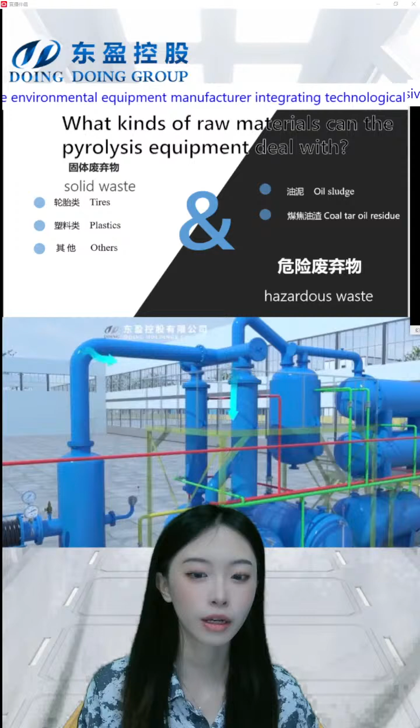This is the Doing Company, and today we are going to have an introduction about what kind of raw material a pyrolysis equipment can deal with. I want to introduce hazardous waste, because we have already introduced solid waste like waste tire and waste plastic, and today our topic is what kind of hazardous waste can use the pyrolysis machine to recycle.

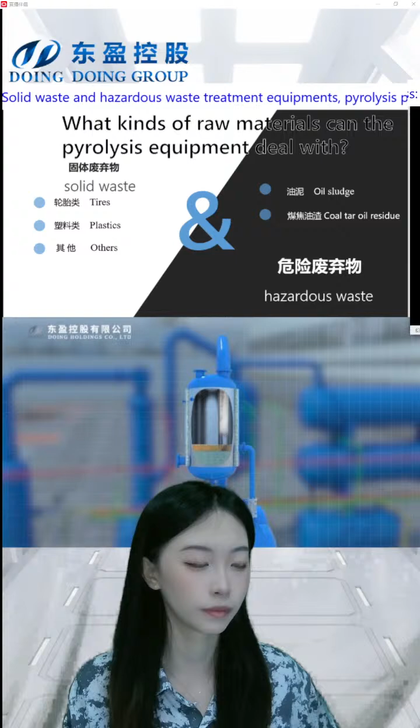Today's topic is what oil sludge can be recovered by the pyrolysis machine, or what kind of hazardous waste. There are many types of oil sludge, different kinds, and today I'm going to introduce which of this waste can be recycled by the pyrolysis machine and can get profit, get the recycled oil, the fuel oil.

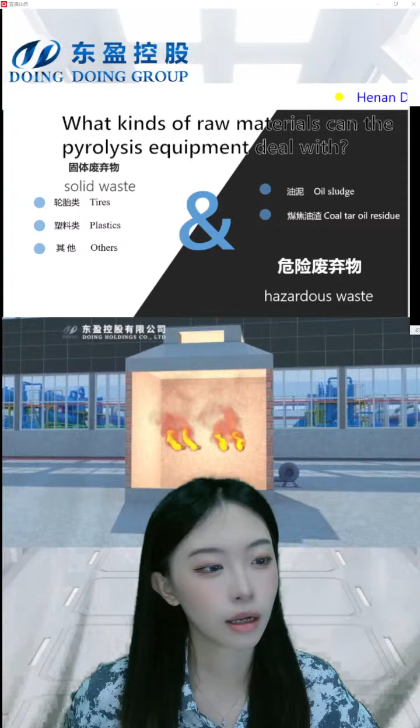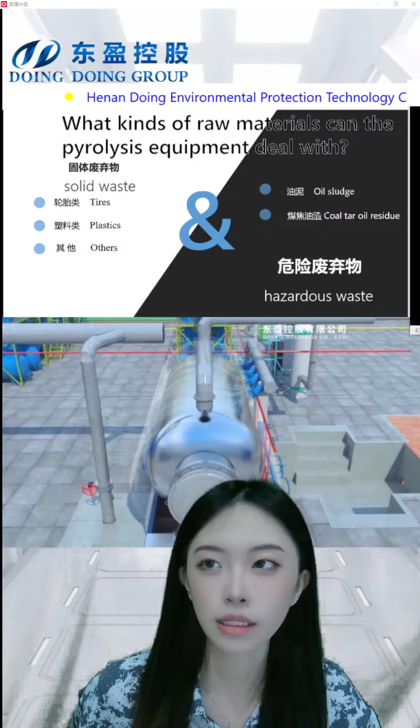Today's topic is about the hazardous waste that can use the pyrolysis equipment to deal with. This PowerPoint shows that it includes oil sludge, coal tar oil residue, and coal tar oil sludge. This kind of waste can use the pyrolysis machine to recycle, and we can get oil and other profits, which I will introduce for you, for example the policy subsidy or other fees to recycle this waste.

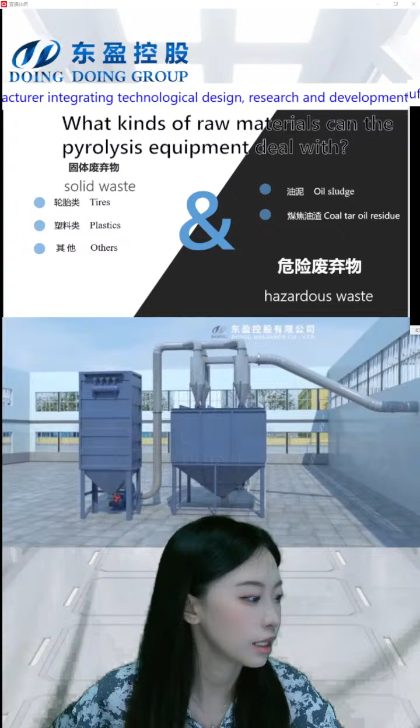This is the main solid waste that our pyrolysis machine can deal with. We have many live shows to introduce this. Hello, welcome to our live show. About the tire and plastic, I will give you a brief introduction, but today's main topic is about the hazardous waste.

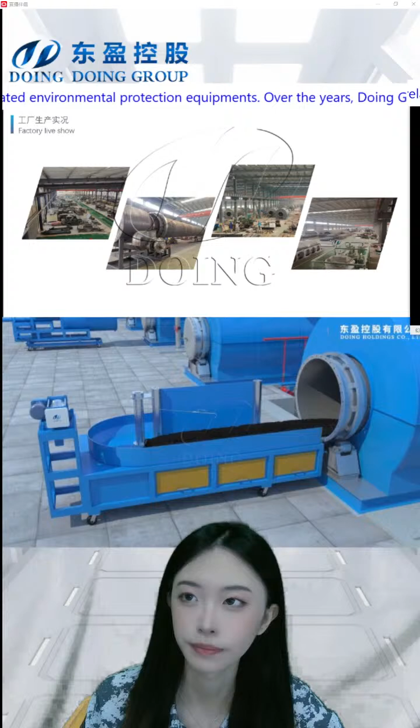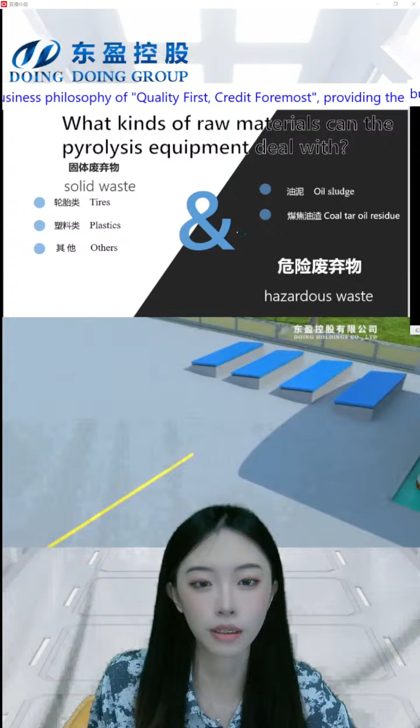Back to today's topic about what kind of raw material the pyrolysis equipment can deal with. It includes two kinds: solid waste and hazardous waste. The solid waste includes materials like tires, plastic, or others, and the hazardous waste includes oil sludge and coal tar oil residue. Today we're going to have a detailed introduction about the hazardous waste area.

Let's have a brief introduction about tires, which is a kind of solid waste. There are different kinds of tires, for example big car tires and truck tires. This kind of tire is very huge, and the oil yield from this raw material is very high, it can reach 45% to 52%.

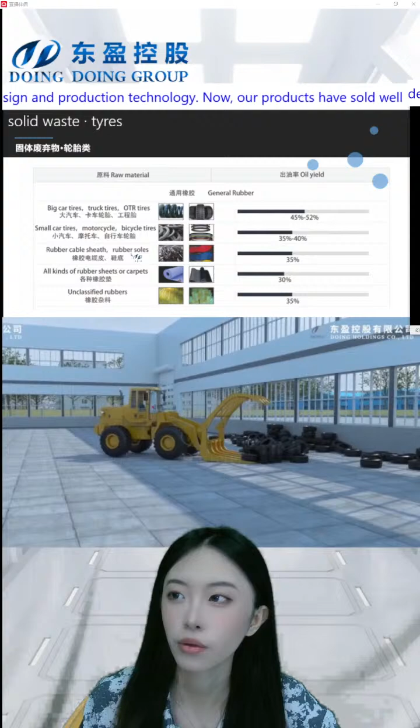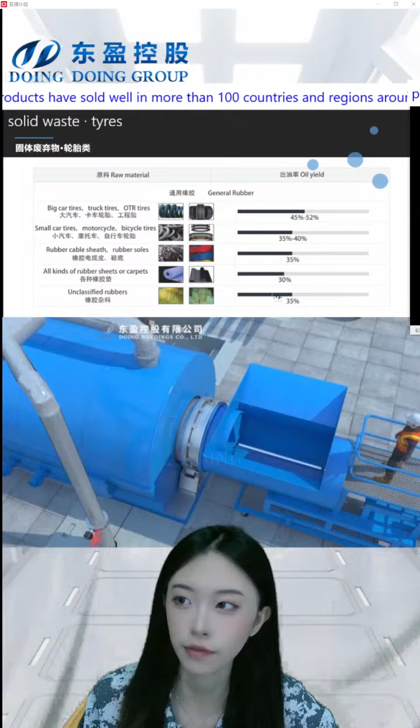For the huge truck tires, we can also use small car tires, motorcycle tires, or bicycle tires. This oil yield can reach 35 to 40 percent. This includes rubber soles, rubber cable sheaths, and another kind of rubber, where the oil yield can reach 35 percent.

And for any other unclassified rubbers, such as rubber sheets or rubber carpets, the oil yield is different, all depending on your raw material.

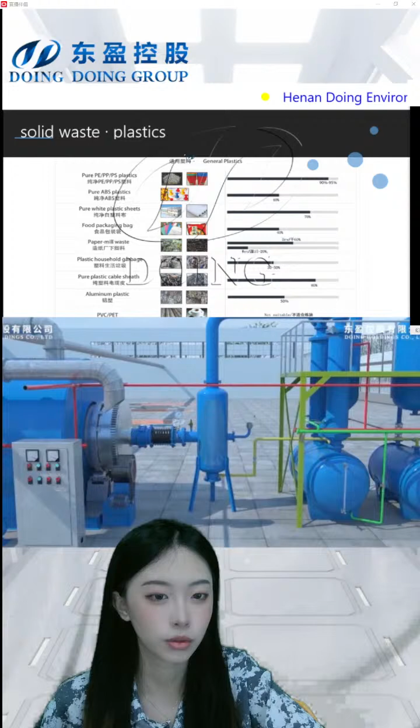Another main raw material is plastic. For example, if you have pure plastic like pure PP or PE, PS, the oil yield can reach 90%, which is very high. And for example, if you have pure ABS plastic, the oil yield can reach 40%.

If you have paper mill waste, food packing bags, or plastic household garbage, this kind of raw material's oil yield is from 30 to 70 percent. It's not certain, it depends on your raw material as well.

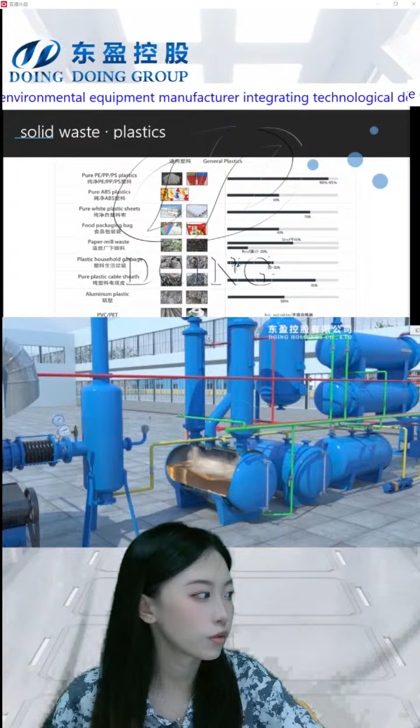One of the newer raw materials this year that more and more clients are choosing for pyrolysis to get oil is aluminium plastic. The oil yield can reach 50%, which is very high, and we can also get aluminium ingot. The aluminium ingot has a very high profit, more than 10,000 RMB per ton.

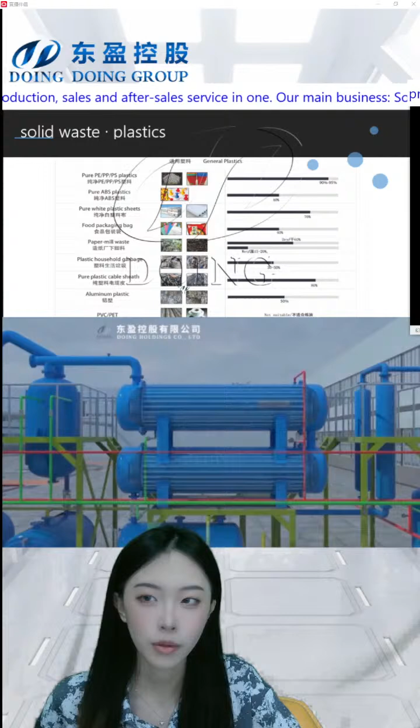So it's very high profit. We can not only get the oil but also the aluminium.

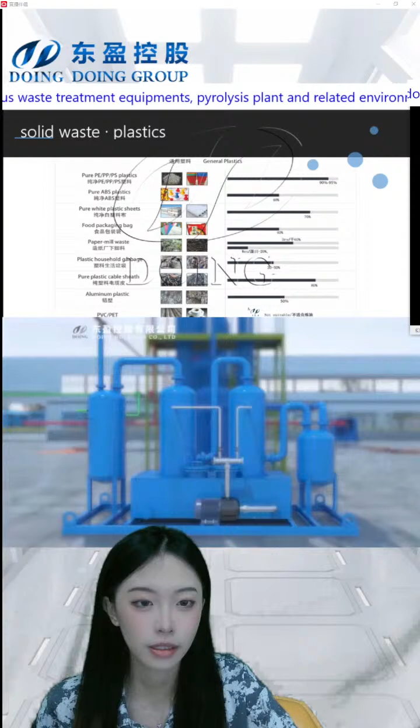Except for PET and PVC, which are not suitable for plastic pyrolysis because they will block the condensing system and block the tube, other kinds of plastic are suitable for this plant.

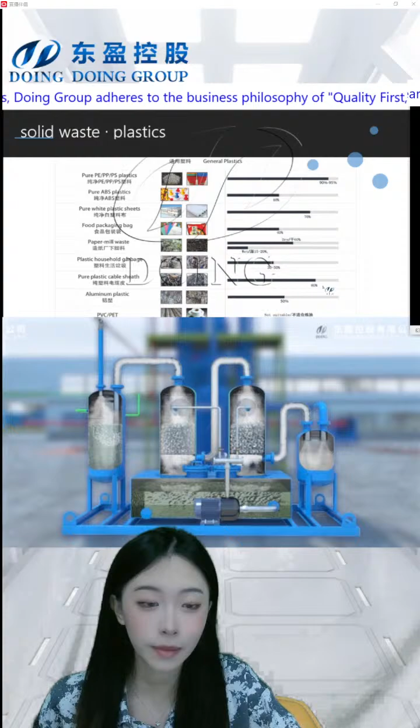All other kinds of plastic can use this machine, our equipment, to be pyrolyzed, and we can get the oil and carbon black. For example, pure white plastic sheets, food packing bags, paper mill waste, plastic household garbage, or aluminium plastic can all use the equipment to be pyrolyzed to get pyrolysis plastic oil and carbon black.

The plastic oil can be used at brick factories and glass factories since it has very high heating energy, so we can sell it at these kinds of places to get profit.

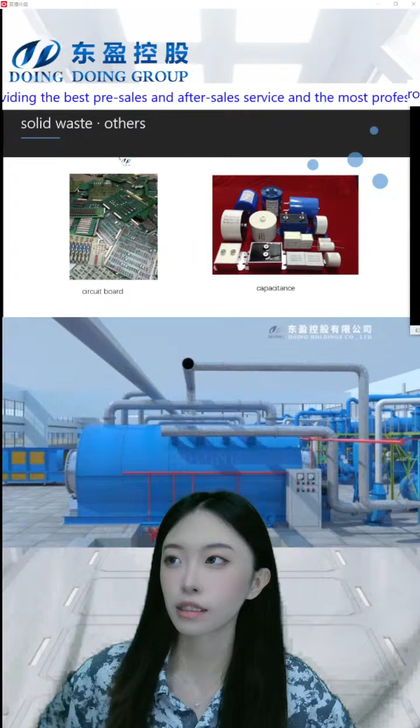This is other solid waste that can use our machine to recycle. For example, the circuit board, you can use this to get oil, or you can get the metal, or the capacitance. You can also use this kind of equipment for that.

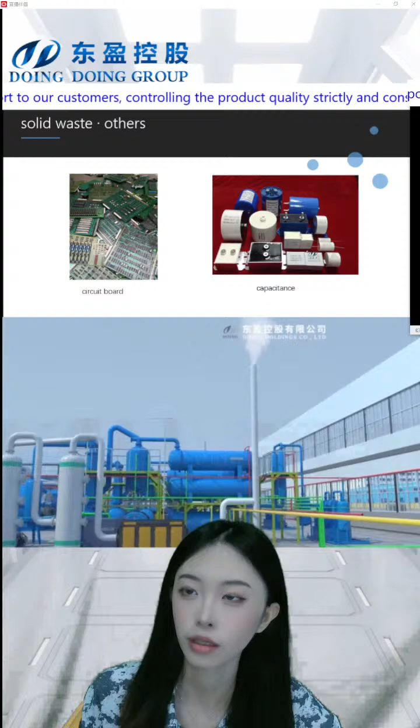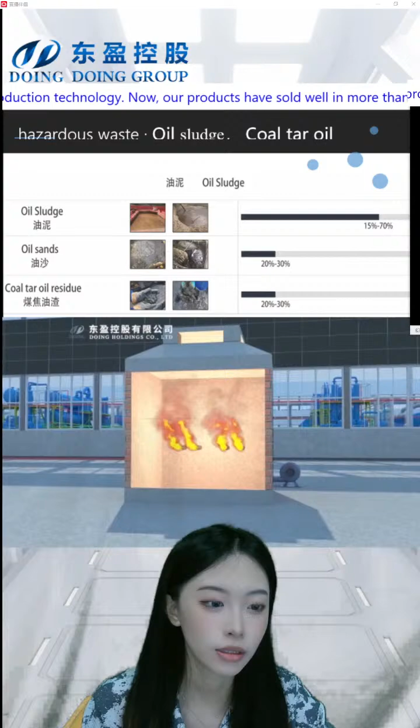Now let's get back to the main topic today: what kind of hazardous waste can use our equipment to recycle. We have different types of hazardous waste, such as oil sludge, coal tar oil, or oil sand. All this hazardous waste requires some certificate or license to have this kind of production.

For example, the oil sludge. There are different kinds of oil sludge we can use with this machine, and the oil yield from the raw material is from 15 to 70 percent. It all depends on what kind of oil sludge you have.

For example, we have different states of oil sludge: solid sludge, liquid sludge, or semi-solid, semi-liquid. These all have different water content or oil content inside. So if you want to use the oil sludge for pyrolysis to get oil, we need to know how much water and how much oil is contained in your raw material.

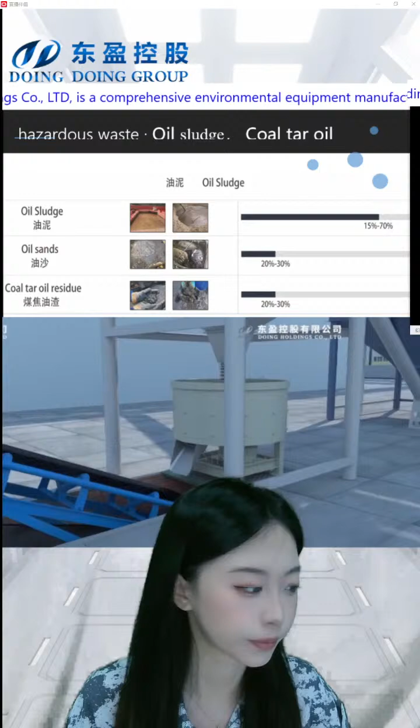For example, we have different kinds of oil sludge, like sludge that is in a tank, where the impurity-containing part deposits at the bottom of the oil sludge tank. We also have sludge from drilling, which has some sludge with plenty of soil, just different kinds. So there is different water content, different oil content, and different soil content, all of which influence the oil yield.

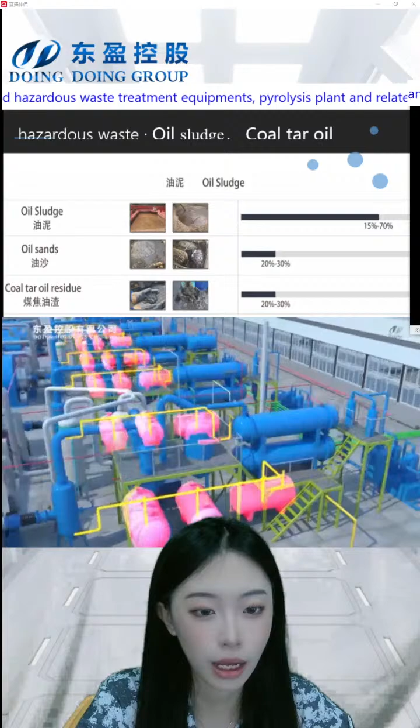For example, solid oil sludge with low oil and water content will have a very high amount of residue, some soil inside this kind of oil sludge. So it will have some problem - it will have a coking inside the inner of the reactor.

So we need some system to prevent this kind of problem. It will not only influence the coking inside the reactor - first, it will affect the service life of the reactor, the reactor liner. And second, it will have some influence on the heating energy, the heating efficiency.

If you have so much coke inside the reactor, it will lower the heating efficiency and use plenty of heating energy, for example oil or natural gas - it will increase your spending on heating energy. So we need some decocking device, and we have different kinds of decoking devices in our company.

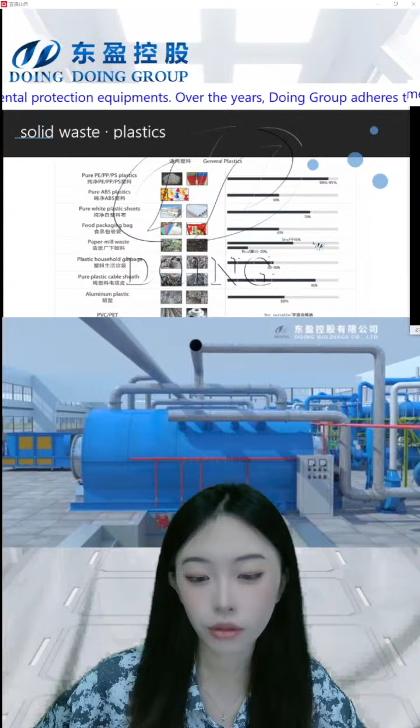So any questions you have, feel free to ask. We have the equipment to turn plastic to fuel oil, and turn waste tire to fuel oil, or oil sludge, coal tar oil, or some medical waste, the daily waste.

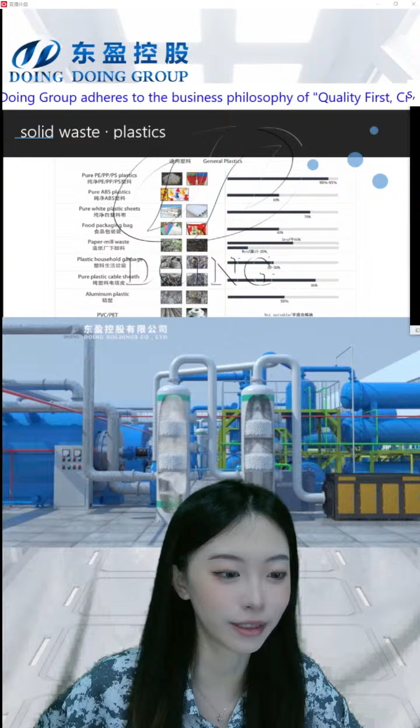Okay, let's go on. Today's topic is hazardous waste. We have different kinds of hazardous waste, for example solid waste, liquid waste, and we have oil sludge from drilling, oil sludge from the tank - it's an impurity containing part that deposits at the bottom of the tank, or some steel mill oil sludge. I will show you some pictures or video about the oil sludge.

And you may ask what profit I can get after pyrolysis, for example pyrolysis from plastic, pyrolysis from oil sludge. If your material is oil sludge, you can get the oil, the fuel oil - not only the oil. Or if your material is more purified, you can get the diesel.

The diesel can be used in large equipment, large manufacturing, or some agricultural machinery. And if you have oil sludge, you can also get some treatment fees, because we can't just have this hazardous waste and put it underground or in a well.

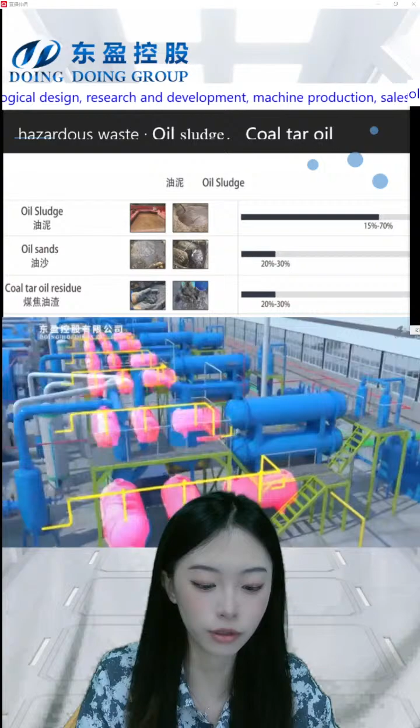We have a factory over 40,000 square meters, and all the equipment, all the details are all made by our factory, our workers.

The wax problem - I'm not sure what the wax problem you mean, to block the tube in the condensing system.

We'll have some design to solve this kind of problem, to prevent it, because if your raw material is plastic, you may block the condensing system because it will have some oil and other things. And we have our own design, our patent design.

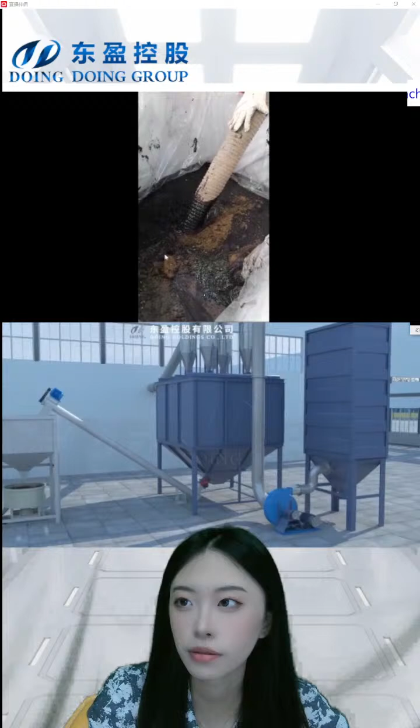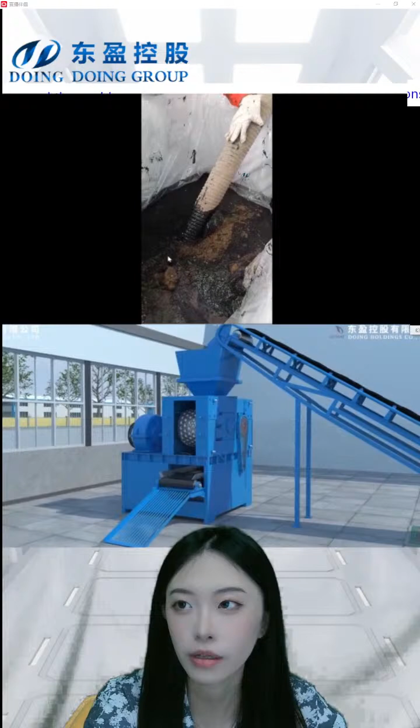You can see this is the solid or some liquid, semi-liquid oil sludge. You can see this is also a bag that has some oil sludge on it - it's also hazardous waste. Then we can use our pyrolysis machine. For example, the plastic bag with oil sludge, or the glove with oil sludge, or the tube with oil sludge are also hazardous waste, and you can use our equipment to deal with it and have it recycled.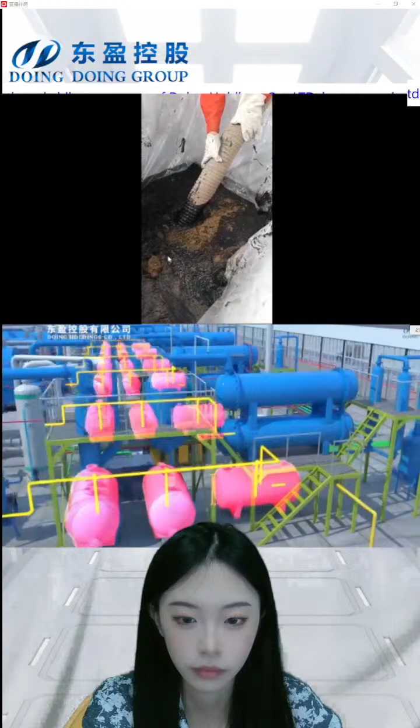This is some raw material that has water content, and we need to have some centrifuge, to use the centrifuge machine. Our oil sludge water content is over 63 percent. Of course, our machine can manage it.

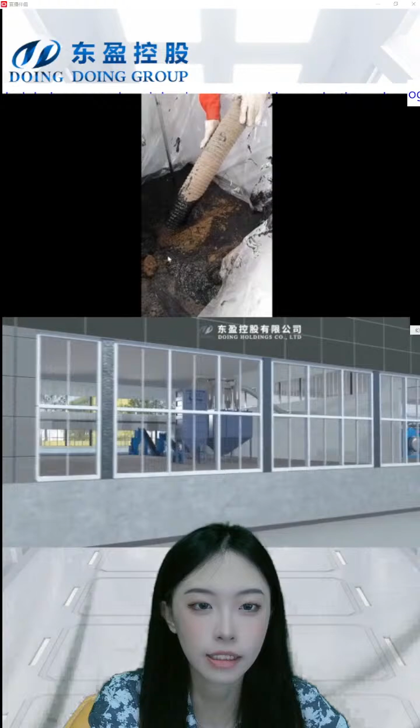We can just put the oil sludge in the reactor and burn it to purify the water, or you can use, as I say, a centrifuge machine. Okay, I will show you some pictures - this is one kind of oil sludge.

The oil-based rock chips can be centrifuged. The solid material - this is after centrifuge.

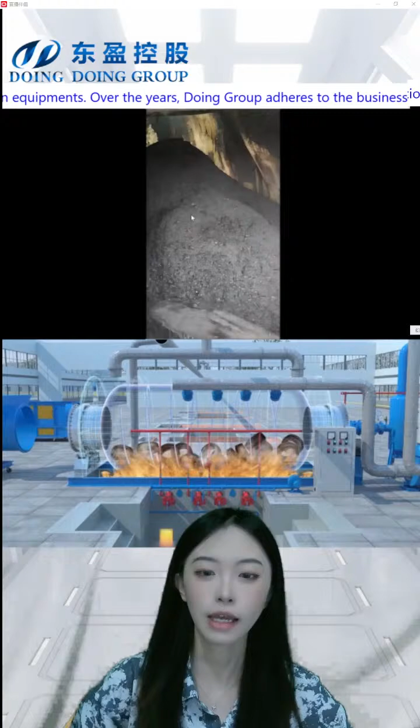If you have some raw material, we can have a test about the water content and the oil content, and our manager will give you an analysis about the profit or the oil yield that your material can get. Anything you want to know more details about, you can contact with us, contact with the sales manager, and we'll give you a detailed introduction.

I can show you some pictures about the steel mill oil sludge. It's disappeared - yeah, this.

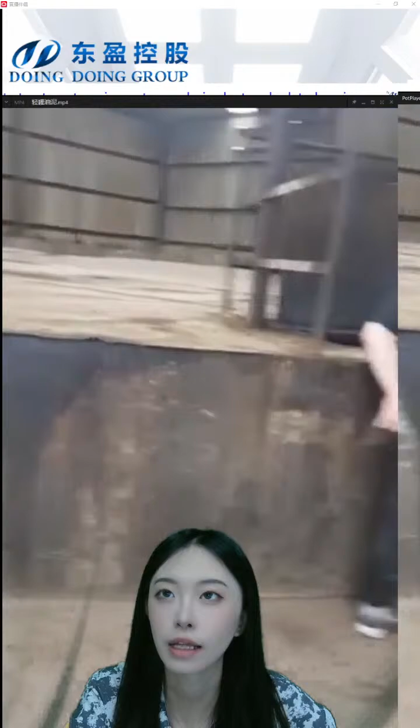This is the oil sludge factory, oil sludge plant. The raw material are all underground. You can see that the raw material - if you have some raw material yourself, you can send some to our factory and we'll have a test.

Okay, this is the oil sludge, some pictures to show. Later I will show you some equipment of our company that can deal with this kind of hazardous waste, because the hazardous waste is very mixed - we have the solid one, the liquid one, or the semi-solid, semi-liquid. We can all use our factory's equipment, the batch type pyrolysis equipment, to pyrolysis it and recycle the oil.

We have 3 kinds of equipment. This 3D video can be used by all kinds of oil sludge, because it's very empty in the tank, and you can throw in all the raw material - for example the oil sludge, the coal tar oil, or some mixed material like a bag that has oil sludge, or a glove that has oil sludge. Other hazardous waste can also use this batch type.

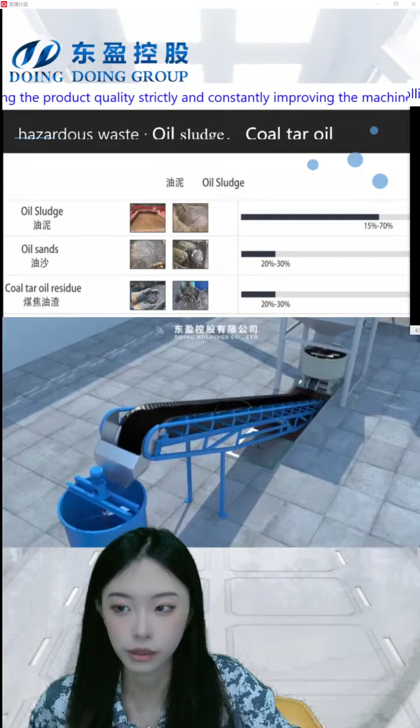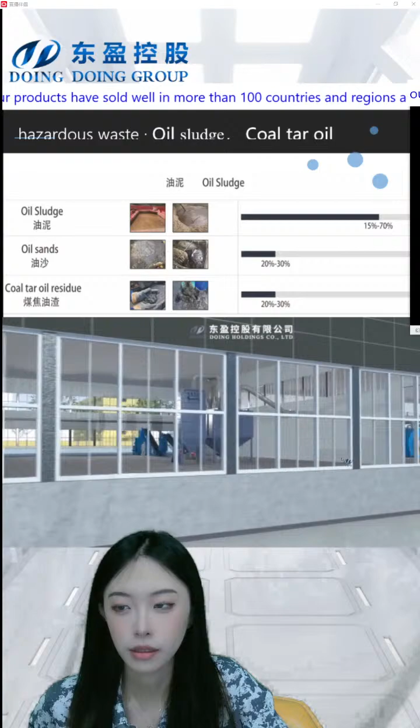The capacity of the batch type is from 10 tons to 12 tons to 15 tons, and most of our clients will choose the 15 tons. If your raw material is oil sludge, you can put more oil sludge than tires. So if you use the same machine, same equipment with a capacity of 15 tons, you can put 18 to 20 tons of oil sludge in it.

And that's a great amount of sludge. Yeah. We also have the small machine, the pyrolysis unit, that can reach to your requirement.

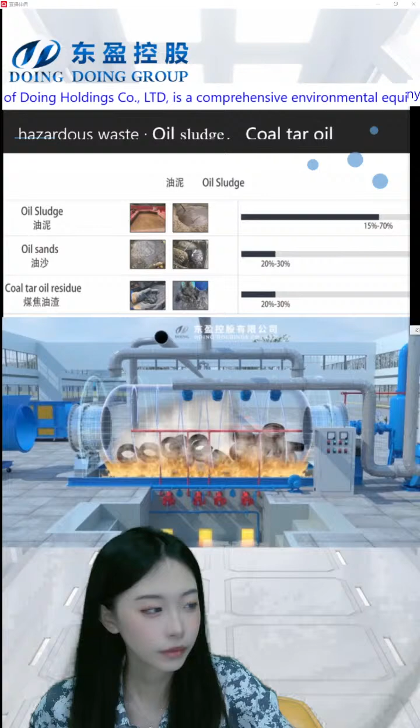Yes, the oil sludge packing bag can also be recycled using this batch type pyrolysis plant. We have customers who recycle the plastic bag, the oil sludge bag. We can - well, I don't have this.

Let me check the video. You can have a visit to the client's factory, or you can come to our own factory to have a visit. We also have clients who use the raw material of oil sludge, or use the oil sludge packing bag.

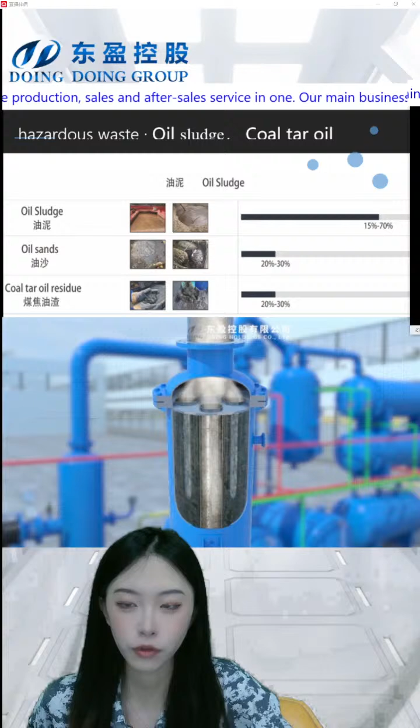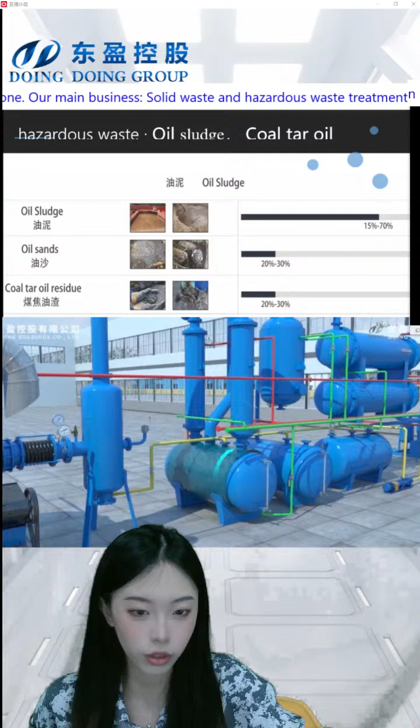So the capacity is different for our machines. For this 3D video, the capacity can be 10 tons, 12 tons, 15 tons, and we also have the fully continuous pyrolysis plant where the capacity can reach 50 tons. One advantage of the fully continuous is it can work for 45 to 60 days without stopping.

You can see the picture. I can show you a picture of one of the clients in China. His raw material is oil sludge. Yeah, he has 8 lines.

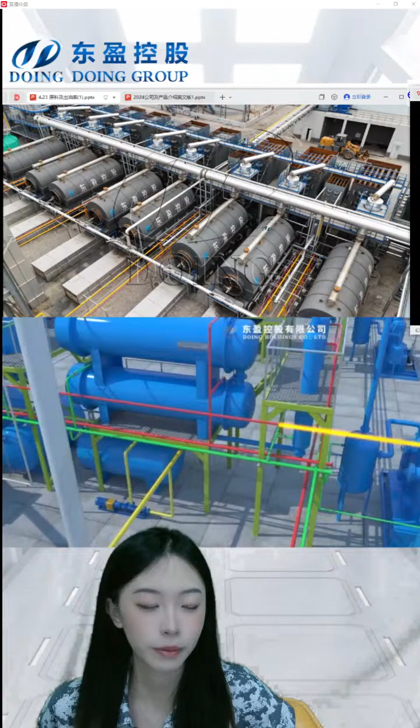This is a pyrolysis system. Next is a condensing system to cool down and turn the oil gas to oil. This is a Chinese company, a Chinese factory, because in this client's province there's plenty of coal, and we have much coal tar oil.

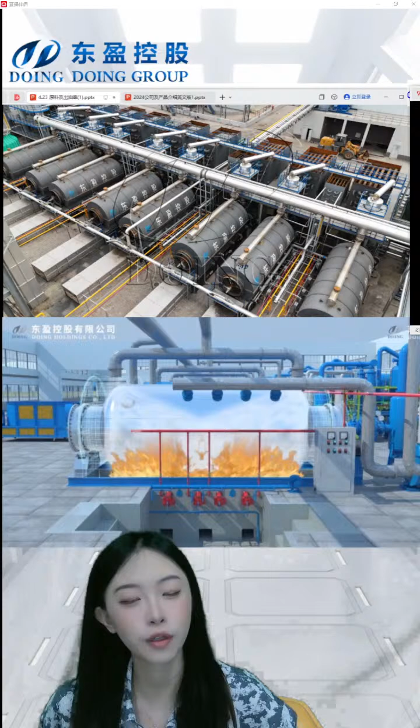It's the same - this is the real photo, and this is a 3D video. It's all the same.

You can see this is the gas purification system, because many of our clients will ask about environmentally friendly ways. Some governments are strict about this kind of thing.

For example, in China, if your material is hazardous waste, it's stricter than if your material is solid waste, for example plastic or tires.

You need some license, a business license, to be allowed to have this project in China, and different regions have different policies. Some regions will have subsidies for tire or plastic recycling or sludge recycling.

Not in China, but in other countries, some of our clients just want to have this project to get the subsidies.

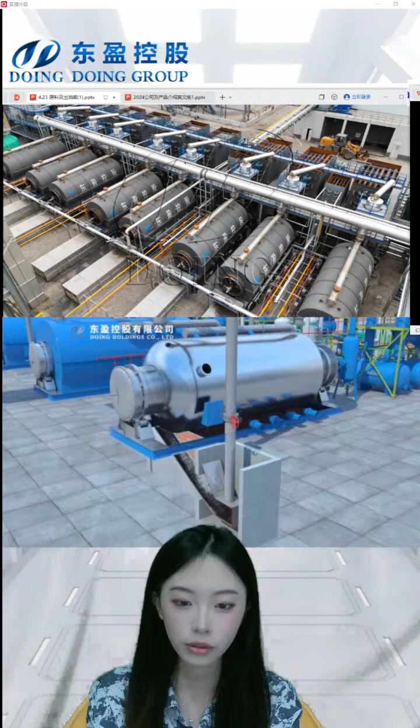So today's topic is about hazardous waste - what kind of hazardous waste or oil our pyrolysis equipment can deal with, and what kind of raw material our equipment can handle. If you have any questions, you can ask or contact me or our sales manager to get more details.

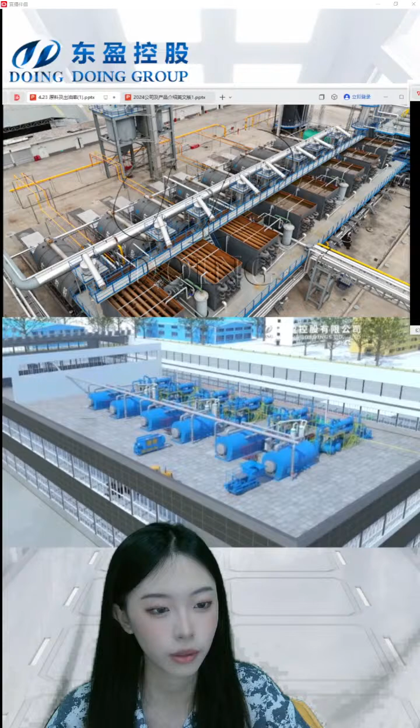We'll train them how to use the feeding system and the discharging system. It also needs some workers - for example, the discharging system needs 2 workers, and the heating and pyrolysis system needs 1 worker to control the temperature. We also need workers to check the pump and the tube very frequently, and our engineer will train them on that.

By the way, if your raw material is oil sludge or other hazardous waste, we need the reactor made of stainless steel, because it will contain corrosive substances that would damage the reactor, and the heating temperature is much higher than for common raw materials. For example, with tires versus oil sludge - if your raw material is oil sludge, we need the temperature to be more than 400 degrees.

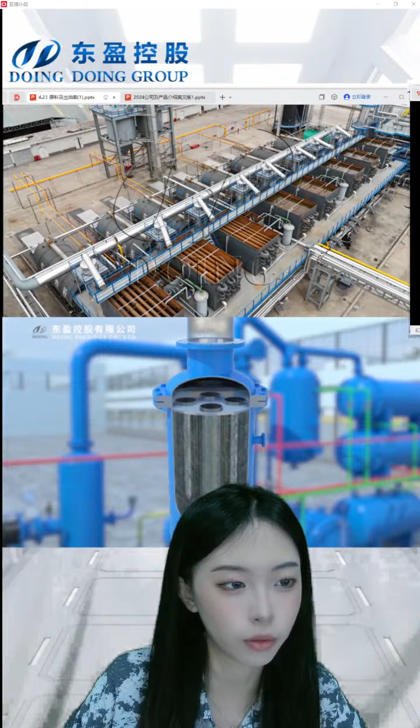And if your material is, for example, plastic, we can get the oil, the fuel oil, at around 180 to 220 degrees. It's different depending on your raw material, and all this training will be provided for your workers.

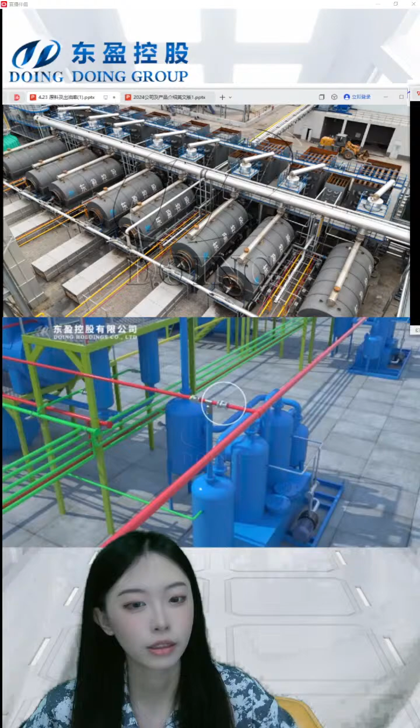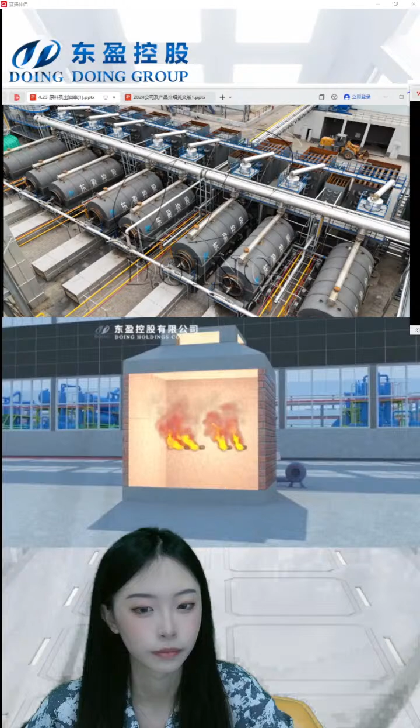As we said, if your material is hazardous waste, we need to design the reactor using stainless steel, because it will have corrosive properties or work at very high temperature. This requires different designs for different kinds of material. Because we have our own factory, we can also meet your specific requirements.

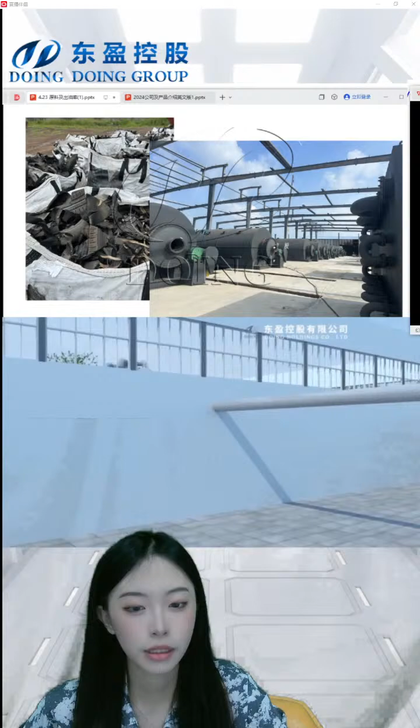There's another picture. This is some client's picture where the material is tires. This customer first shreds the tires into tire blocks and then puts them into the reactor.

This is the outlet - we can get the flue gas. The flue gas will come out to the outlet, and first it will go to a condensing system. The condensing system has two effects: one is to slow down the speed of the flue gas to ensure efficient condensing in the system.

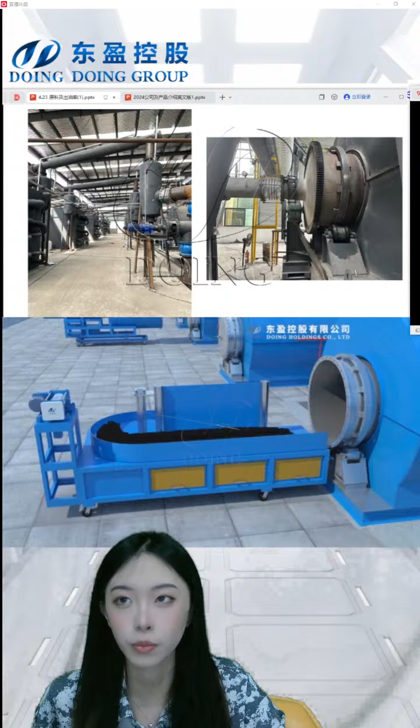Second, it will deposit impurities - for example, carbon black or oil coal sludge in the flue gas. It will deposit this kind of material. And if you buy the system, you can have it pull the carbon black or oil sludge and return it to the reactor.

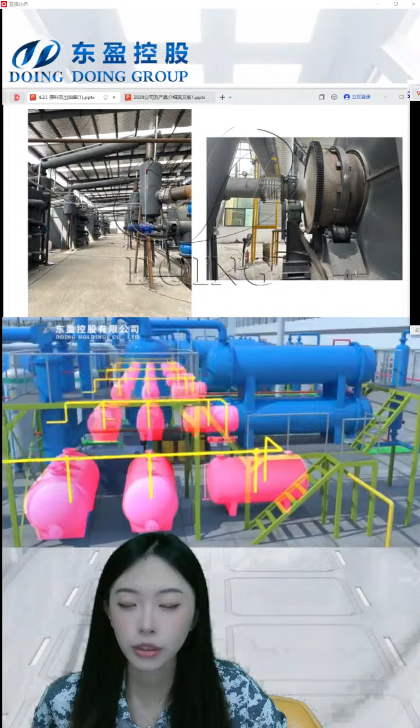And this is a condensing system. This picture shows a water tank, for example, this is a water tank for condensers. And we also have another kind of condensing system, the tube condensers. They have different advantages. If you want to know more, you can contact us.

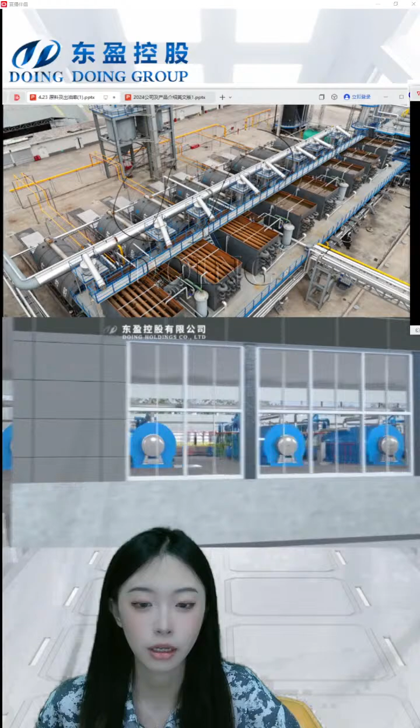I have 100 tons of tires. You can know more about this tire pyrolysis machine. We have different capacities. For example, the biggest capacity is 50 tons. If you have 100 tons, you can get 2 lines.

About the tires, you can use the pyrolysis machine to get the tire oil, the fuel oil, the carbon black, and the steel wire. The fuel oil you can use at a factory, for example, the glass factory or the brick factory, as heating energy. If you want to know more, you can just contact with us by WhatsApp or email.

Or we also have the unit, the pyrolysis plant unit. It's for a smaller capacity, 100 kilogram or 500 kilogram. You can have a know about it.

Sir, if you only have 100 tons of tires and you want to sell these tires, you can contact with us. Also, we have some clients who want to buy the tires, or other sources, we can share.

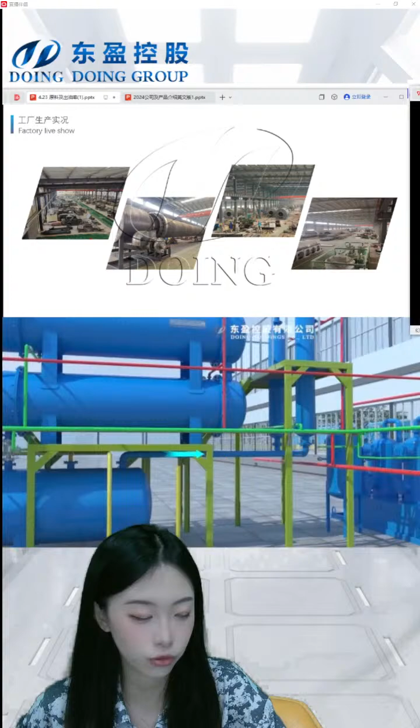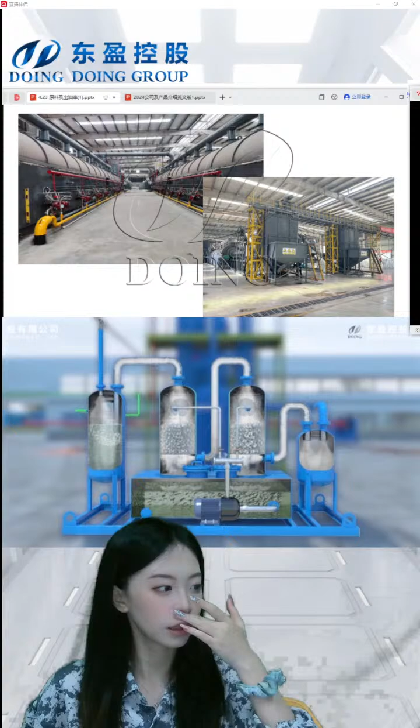This is some certificates. You can see some certificates about our factory. Because we have different clients in different continents, they may ask, do you have the European Union certificate? Well, let's show some pictures about it. Wait a minute. The ISO, the European Union certificate, or some certificate in China, some license.

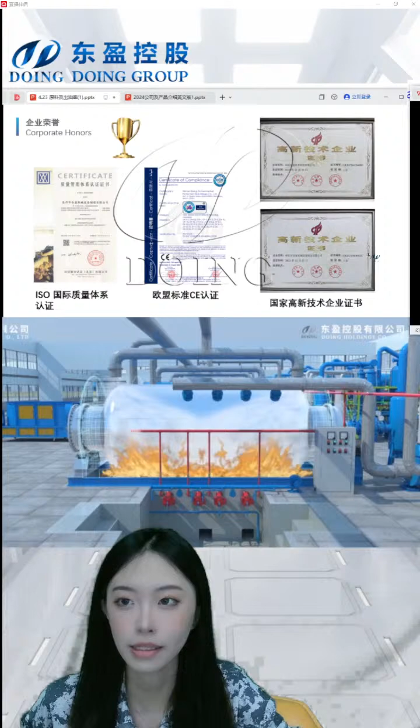So we have a history of more than 10 years. We have our own factory, and more than 120 countries have our clients. You can have a visit there or visit our factories.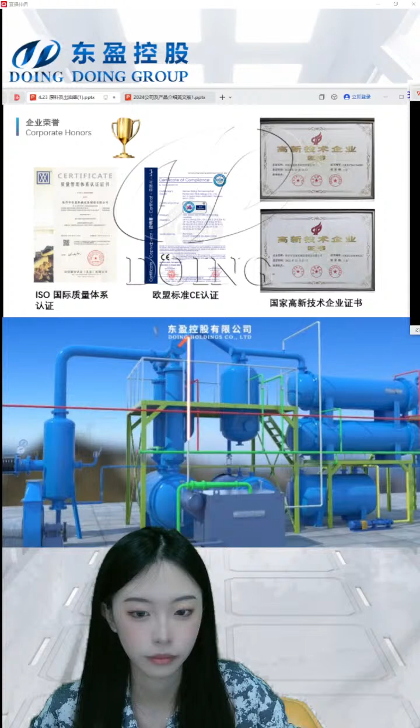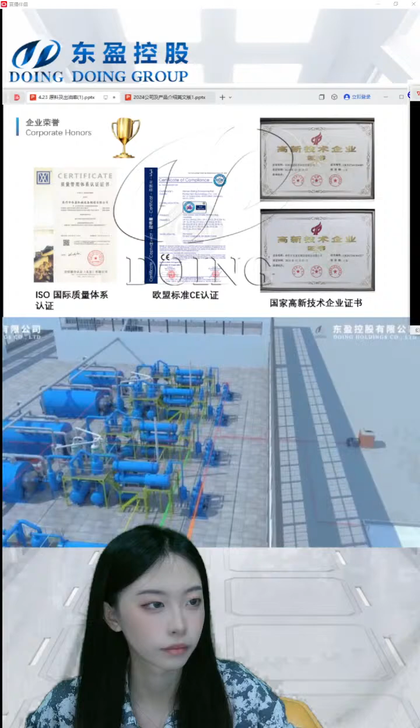Sir, do you want more details or the data? This kind of information, you need to contact with a sales manager.

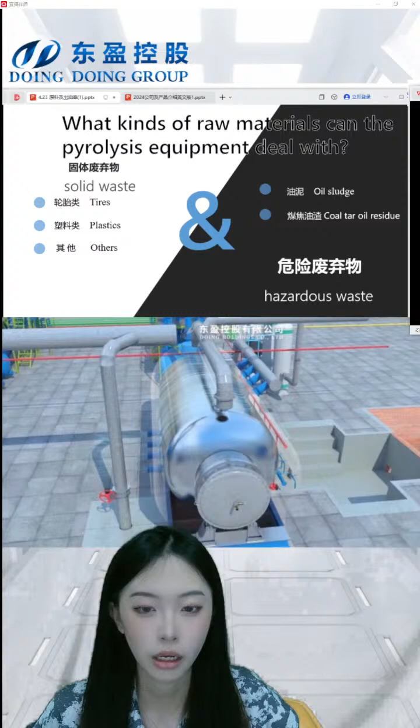How to contact with us? You can use the email or WhatsApp. We are in China, we are a Chinese company, and we have our own factory. You can have a visit, or we have our customers all over the world in each continent. If you are nearby our clients, you can visit these factories, and we have a branch company in Nigeria.

Today we give you an introduction about hazardous waste. One of the main hazardous wastes is oil sludge, and there are different kinds of oil sludge. We have the solid one, the liquid one, or some sludge that is deposited at the bottom of the storage tank. This kind of sludge, or some sludge is from steel mill, or some from drilling.

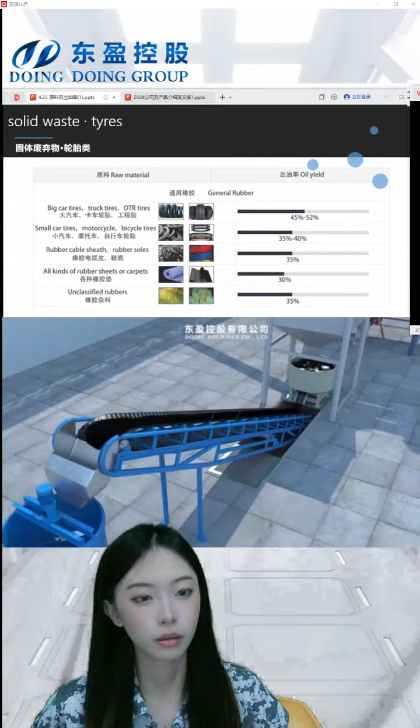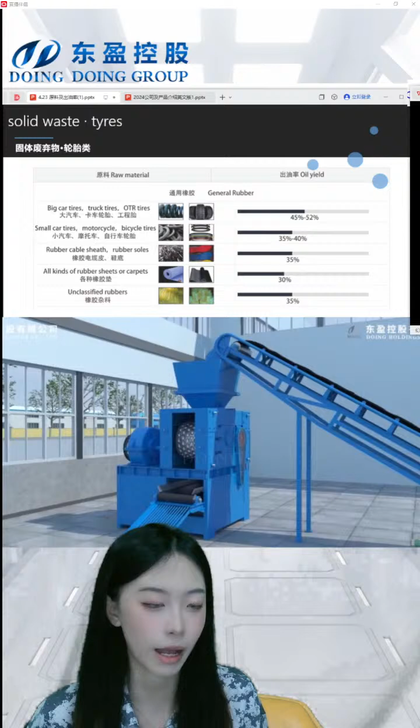So all kinds of oil sludge have different water content or oil content, but can also use our equipment. All the oil sludge can use this batch type. Some kinds of oil sludge, for example, the liquid or the semi-liquid, can use the fully continuous type. It has larger capacity and better efficiency.

Well, you may ask about some problems we'll have in the oil sludge pyrolysis. For example, it will coke the raw material, coke the reactor. We also have some ways to solve this problem, and it's our patent device. If you want to know more, just feel free to contact with us.

Okay, then this is today's information about the equipment, and information about the hazardous waste. No more details, just feel free to contact with us. We are the Doing Group.